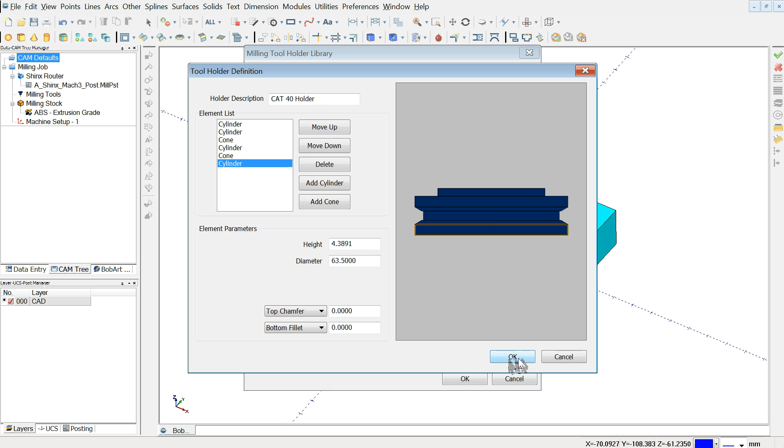So let's look at, as an example, we'll use a Cat 40 holder, and I've already modeled an ER32 arbor on that. So let's look at how it is as it's set up in Bobcad. The holder portion is the top portion of the overall tool holder, and it's just comprised of cylinders and cones. So you can adjust these to actually match precisely whatever holder it is that you're using. And so the first step will be creating it here if it isn't already here. So in Bobcad, you need to create your holder if there isn't one that already exists that matches. We're just going to work off ones that are already here for the sake of this.

And so then let's look at the arbor portion of that. It's the part added on to the bottom here. So you've got your holder at the top and your arbor at the bottom, together creating the overall tool holder. Again, if one of these works that's already there, you can just go down through and grab all these dimensions and you can model one of these. What you need to do is make a model of this. So while there will be one in here that it's going to use for collision checking and will actually show up in the machine simulation, there will also be a model of it in the model we create.

And I find that you really should use both, because it helps you to be sure that you've got the right holder in there. If you actually change holders a lot, you might have to modify that a little bit, but for the most part, a lot of us use the same holders for everything, and so if that's the case, then you're going to want to create the holder in your model.

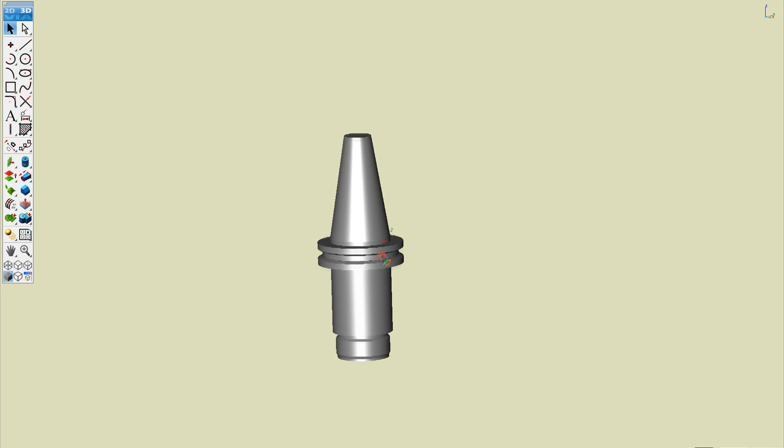So anyway, we have all this stuff here you can use to generate your tool holder, and I've already got one ready. I like to model in ViaCAD, and so this would be like the typical ER32 Cat 40 holder. The upper portion would be up inside the spindle, and then if I get rid of that, the portion that's left is the same as what's in Bobcad. So if I go back to my mill tool holders and go to edit arbor, you can see that it's basically the same thing. And I pulled the dimensions right out of Bobcad to make this one.

So once you have this holder, one of the things I like about ViaCAD is I'm able to just move things around really easy. Transforming is a breeze in ViaCAD. I think it's one of the best programs for that. So if you're doing quick 3D sketches and models of things, I think ViaCAD is excellent for that. If you're doing things that are getting really complicated, then other things like SolidWorks or Fusion are a little bit more stable. But for what we're doing today, this will be perfect.

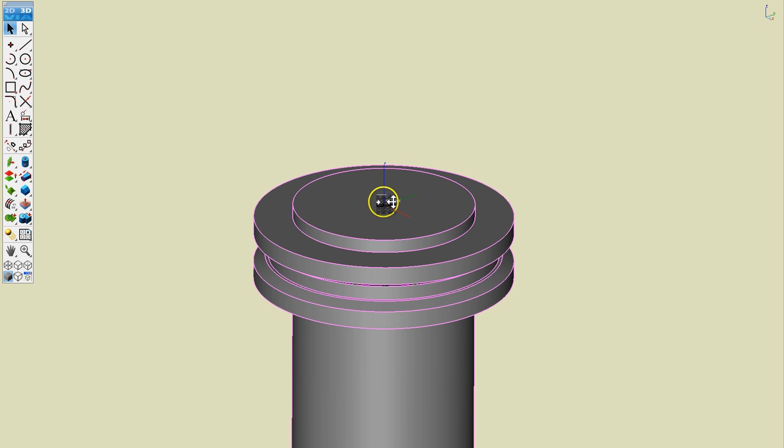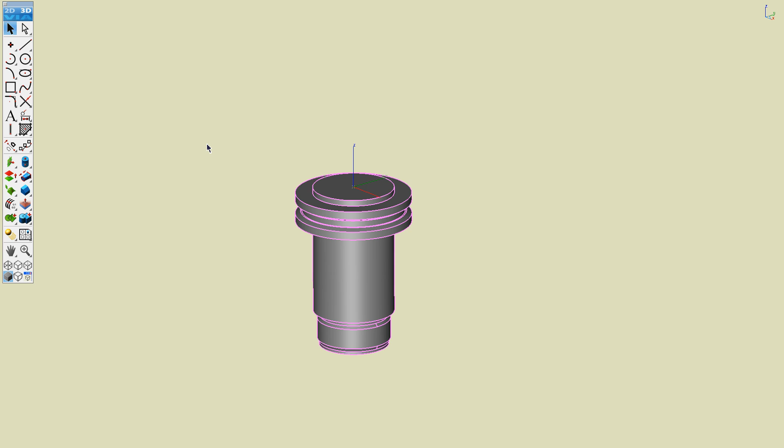So the main thing is that the top center of your tool holder needs to be the origin. And the origin of the machine, the way I look at it, is your home position. Now you could put that in a lot of different places, but my preference is to have it at the top of the Z-stroke, exactly the same as it is in the real world. When my machine homes, the Z-axis homes to the top of the Z-stroke, and on a router you actually home to the corners. We'll create a quick machine that homes more like a typical mill, but regardless, you want to model your machine starting at this arbor and working out so that it all lines up with the same X0, Y0, Z0.

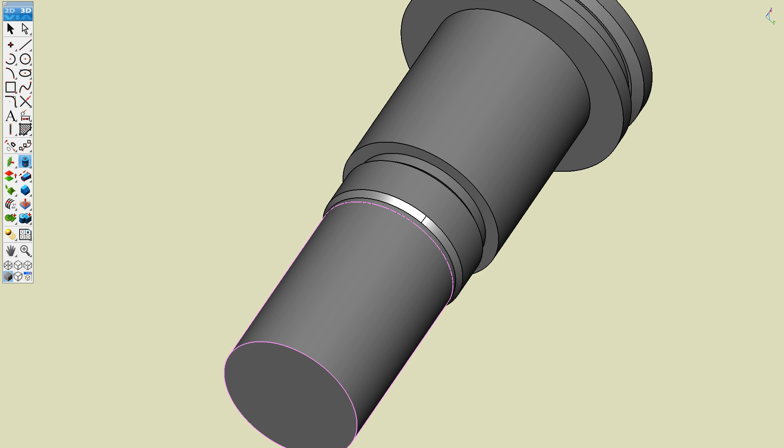And the way Bobcad works is, once it's in the simulator, it will actually take the tool holder and the tool, and it's going to compensate for their length and push the head up anyways. So I'm just going to add, for the sake of visuals, a quick tool. I won't actually export this, but we'll just throw a tool on here. That tool diameter will be 12.7 millimeters, or a half an inch, and 65 millimeter protrusion. So it'd be an end mill or a router bit or whatever it is that you want to think of it as.

So this is where we're starting from. Now let's look here then.

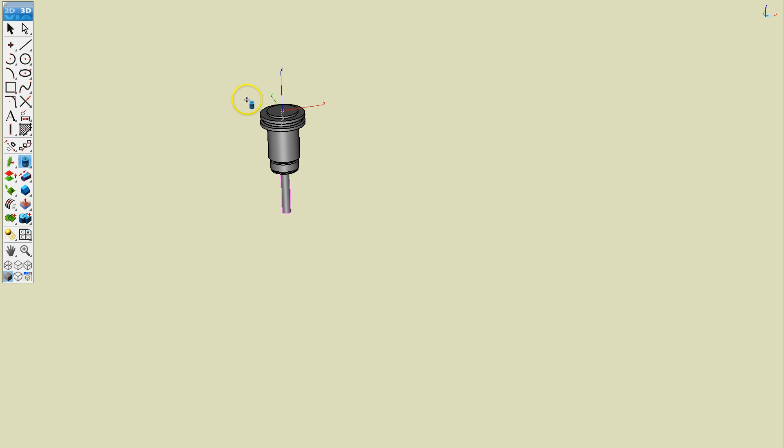And my mouse has been misbehaving today when I'm doing a video recording, so it's a little bit trying at times.

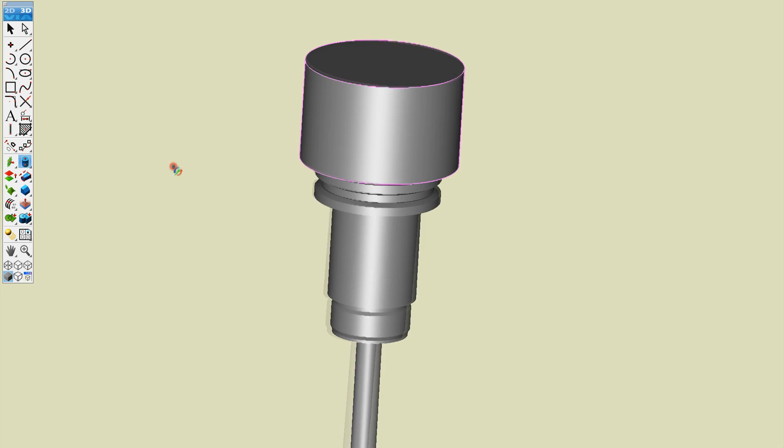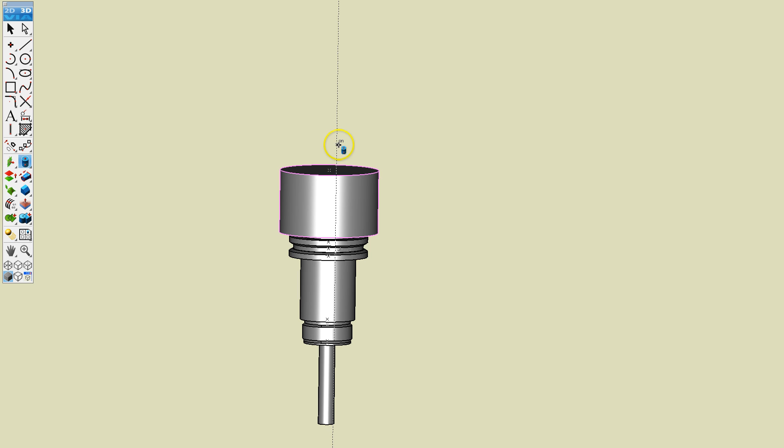So I'm going to start with creating what we could term the spindle itself, and I'm going to make that about maybe 80 and 50. In the actual mill, this probably extends further up, and may even be a little bit larger than that, but that's close enough for now. So that's our spindle. This is the first part of the actual machine, and if you were to do a tool change, you would pull that tool holder out, but this part would remain. In the real machine, obviously, it would have a taper, and that taper would be a cavity there, but we don't really need to do that for the sake of the simulator.

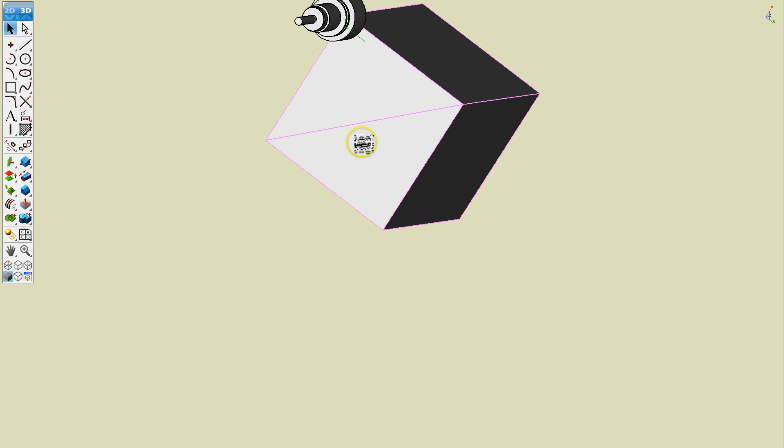Okay, so now I'm going to create the rest of the head. And I'll make this about 250 square and about 350 tall. So again, I deal mostly with routers, so it's a little different than a mill probably, but it'll still get the point across. Just gotta find my midpoint there. Sometimes this goes better than others.

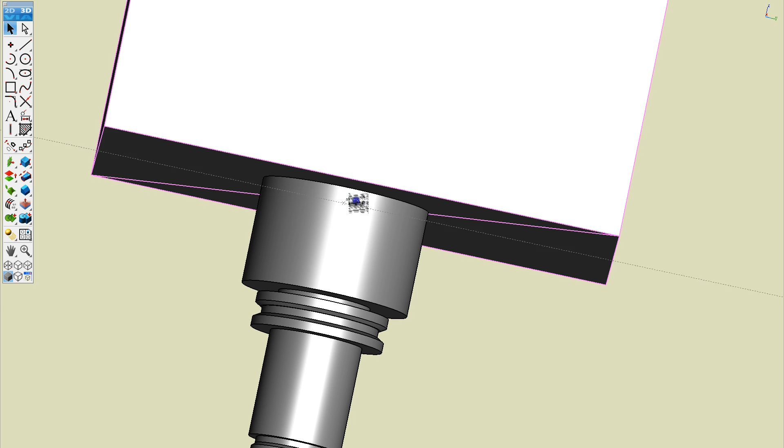I'm also using a screen that is a lot trickier to use than I'd like, because it's a 4K monitor and I'm only using about a quarter of my screen right now, so it's very hard to see. It'll look big on the video, but it's actually quite small for me.

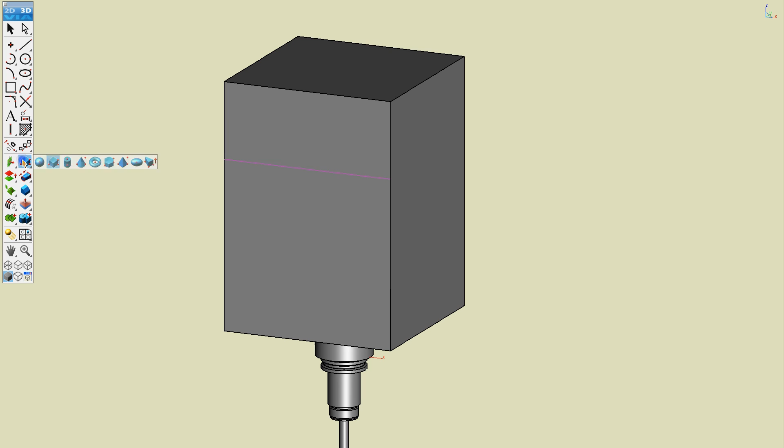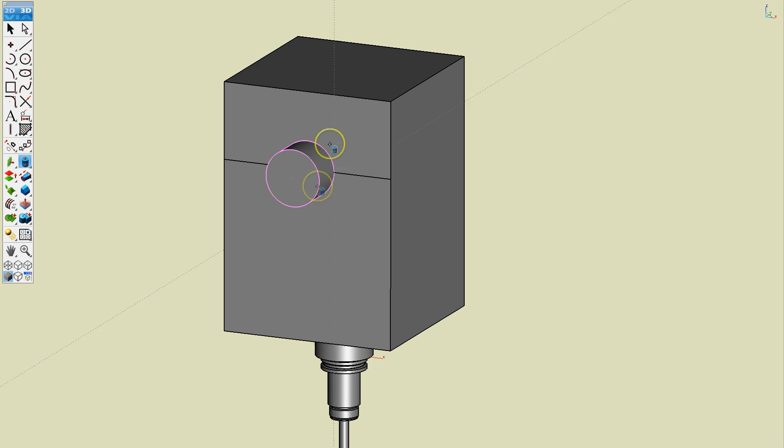Alright, so there would be our head. You can make it as detailed as you want. This would be the front because the x-axis is pointing the other way, so this would be the front of the mill. So for instance, some of the details you could add, my machine has a micro adjusting dial, and we'll make that 65, 80 by 50. And so that's just so that I can micro adjust the height of the z-axis. But I just wanted to add that in so that I can show how you can group things for giving them a color.

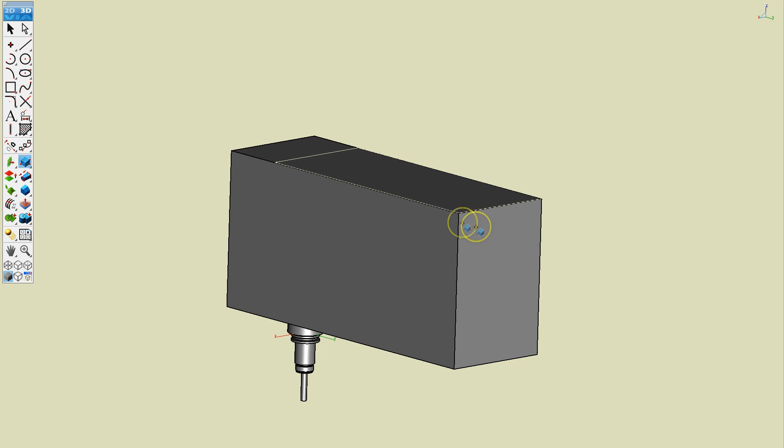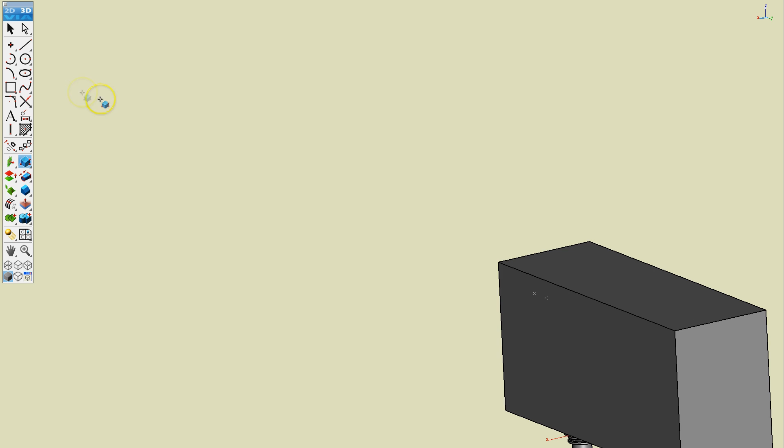So let's now expand this side. I'm just going to make this bigger by about 500. Okay, and this isn't really all that realistic, but it's just for the sake of demonstration. So now I'll do another one. I made a mistake there. Let's try that again. I see it's still on my other work plane. Let's see, over 1,000. Okay, and maybe I'll even make that 1250.

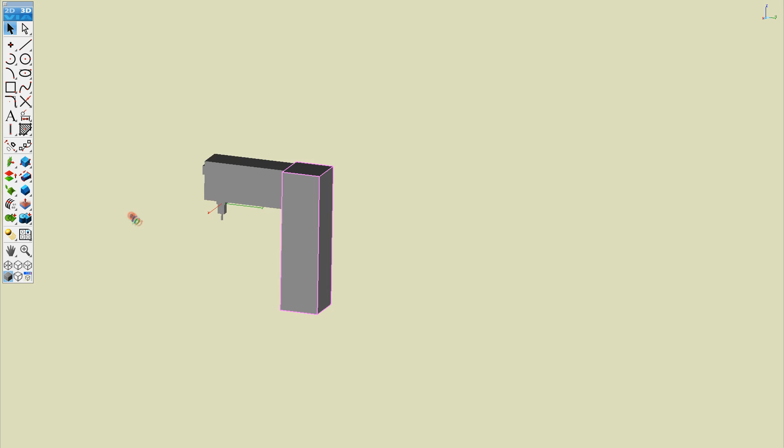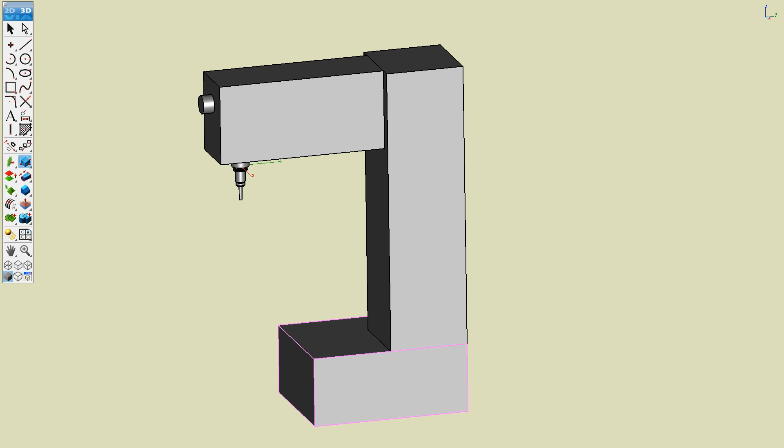All right, now a base. And that I will make like that. And for the base and the column, I just want them to be one entity, so they'll be added together here. Okay, and now say 750 by 500 by 150.

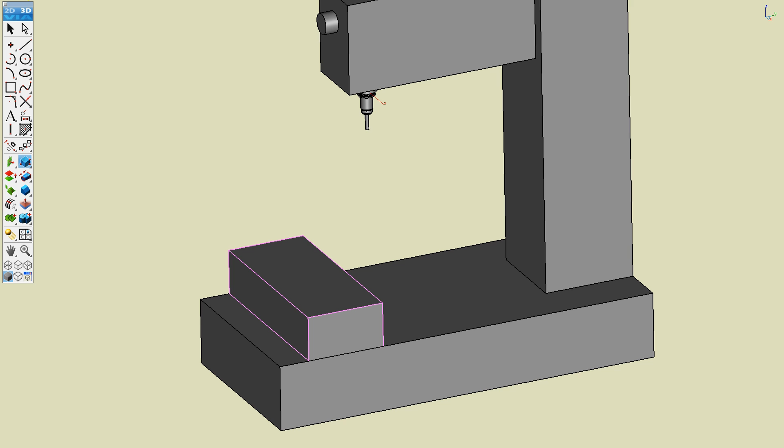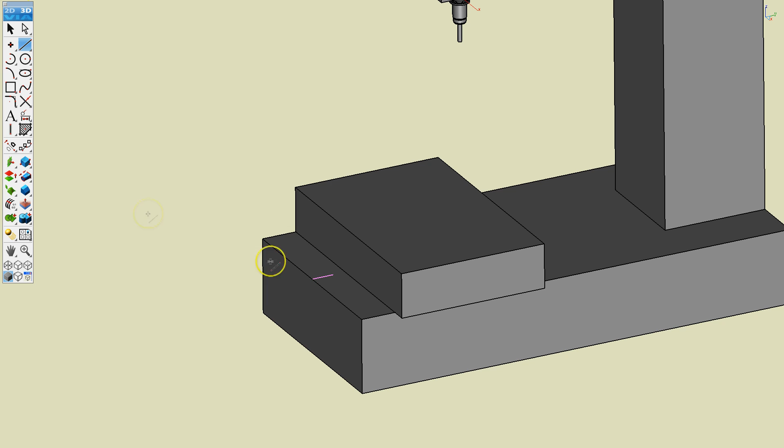That'll be our y-axis. So we have our z-axis and our y-axis here. And I want it to home with the table back, because homing Y negative is, I think, most common. So we'll say that it comes within 75 millimeters of that edge. Again, you would have to know your real machine, what exactly it does, and you want to get it right down perfect. Whatever it is that it does when it homes, that's what you want it to do in your simulation. I'll do another.

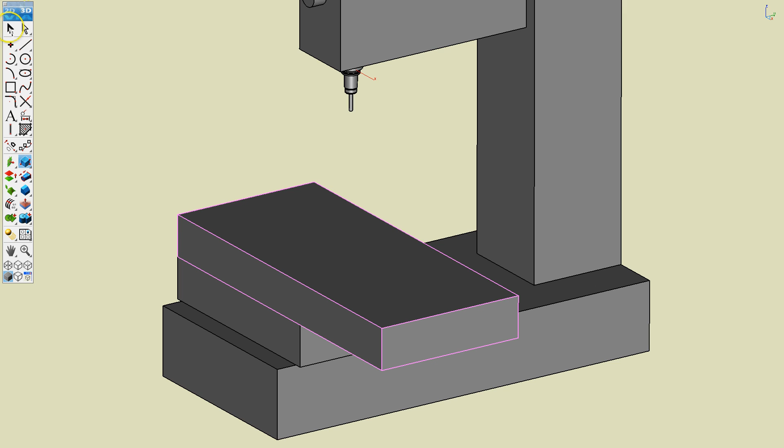This one will be 1250 by 550 by 150. Okay, so that is our x-axis, and I think I need to just move this over by 25.

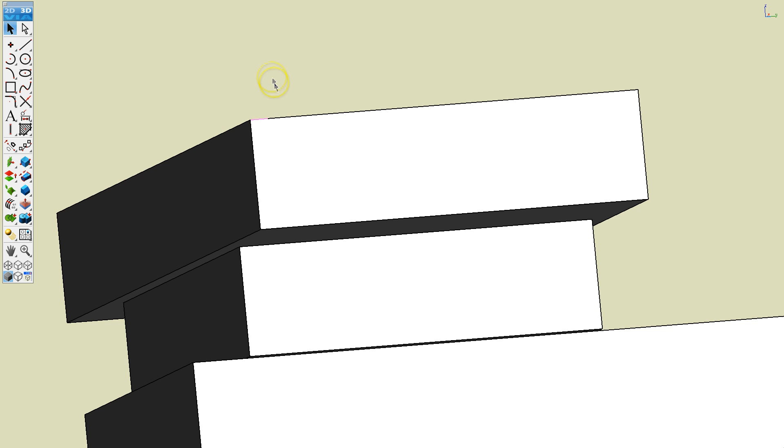Okay, so now we have our x-axis, our y-axis, and our z-axis. Your configuration may be a little bit different, and then you just have to adjust in Bobcad as to how you set up the machine in the system.

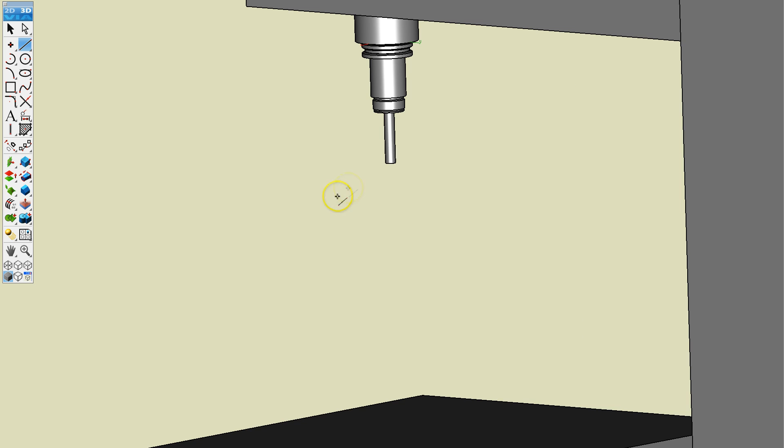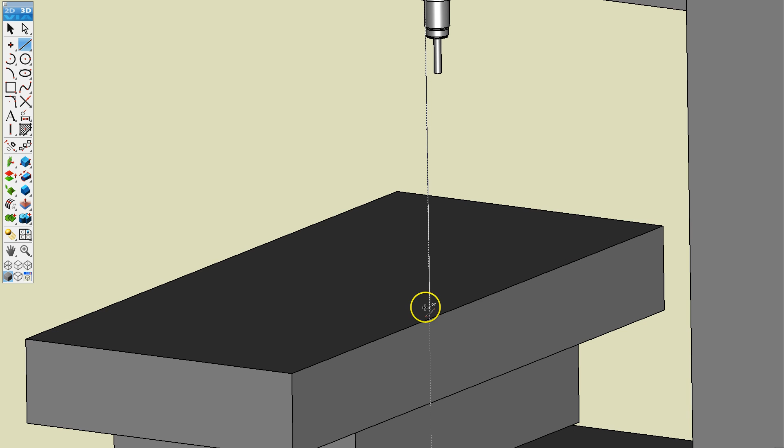Another thing that we need to know at this point is essentially your work offset, because just like in the real world, the simulator will need a work offset down to your table so that you can put your part down on the table. So basically that comes from the bottom of the spindle, because it's going to automatically offset for the holder and the tool, and so there it's intersecting. That's 550 millimeters between the spindle and the table.

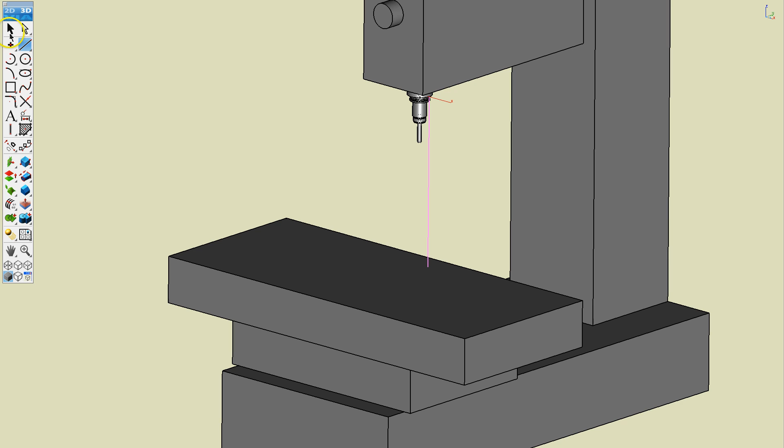So basically, whatever your work is, let's say that you have 50 millimeter thick material sitting right on this table, then you need to offset the head down 500 millimeters, and then Bobcad will automatically offset it back up the height of the tool holder plus the tool. And so then essentially, if 0 is at the top of your stock, that would place the end of the bit at the top of your stock. So 550 is our number for that.

Otherwise, I think we've got everything modeled that we need. I'm not going to keep the tool. I just wanted it there as a visual, so I can make sure that this looks about right. So let's export these parts as STLs, and we want binaries. And so I guess first I need to select.

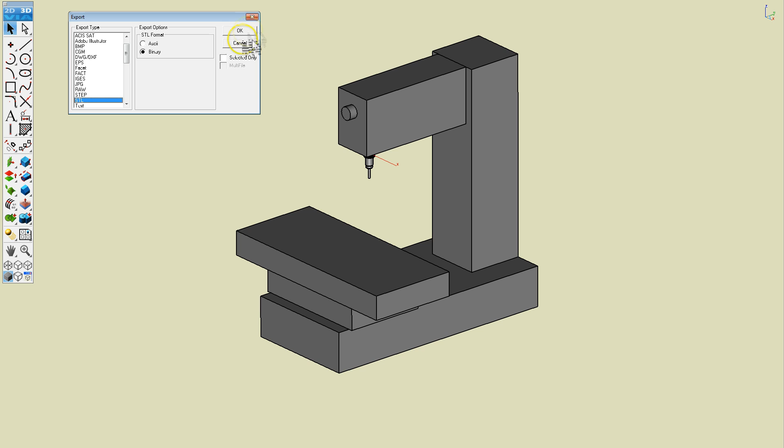One of the things I can do is I can make things the same color, and I want to keep the tool holder in mind. You could opt to not have the tool holder, but in this case I want it because I want to show why I like to keep that where it makes sense. Like if you're someone who has the same tool holder all the time, but may have a couple different machines that have different tool holders. So let me export that, select it only, and I put it into this folder here, and that'll be the tool holder STL.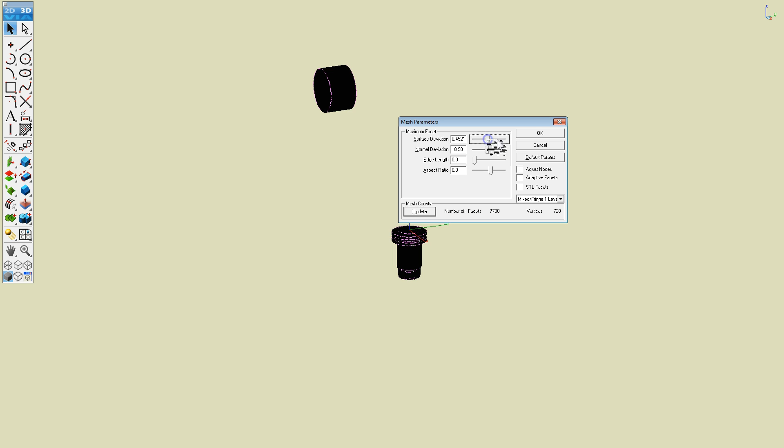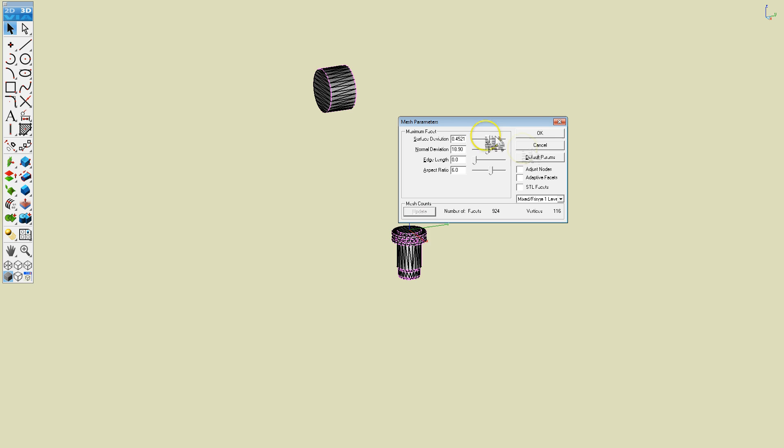And so here it gives you the number of facets you're using. Since we're not really collision checking with these necessarily, we can reduce the facets down to something more manageable, because the software will still make these look really nice. It doesn't need that many faces. If you were using something to collision check, then having more faces would probably provide a better collision check. But for visual stuff, it doesn't really matter so much. So hit OK.

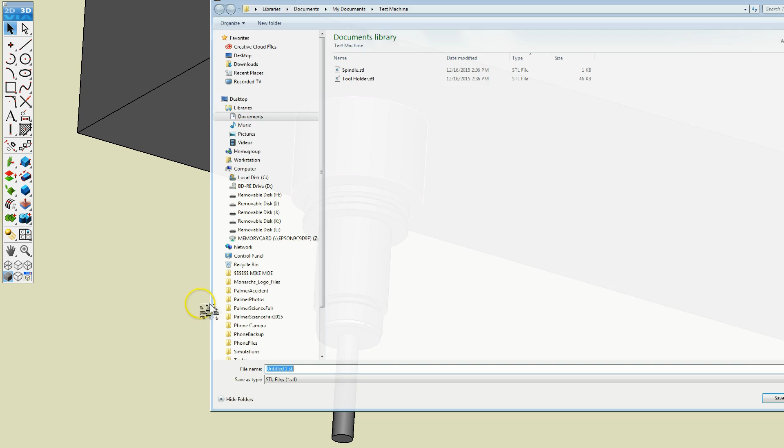Now this is our z-axis, or we'll call it the spindle. And you're never really going to get less than 12 on a box. That's just what it is for a box. Cylinders, though, is where you can save some facets. So we'll call this the spindle end. In fact, maybe I'll just change the other one's name here to z-axis, and then we'll call this one spindle.

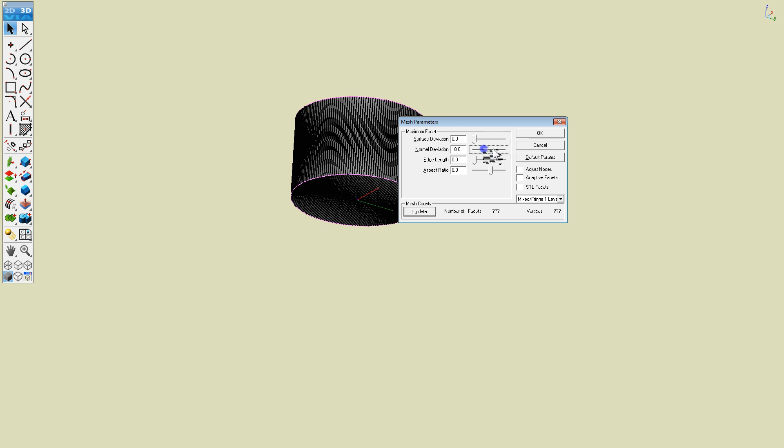Alright, and again, you can see there's a lot of facets there, a lot more than we need. So we'll just crank that up. That's good enough. Just to make sure that we didn't overwrite that other one. Yeah, we still have our files. Alright, and we'll do the column.

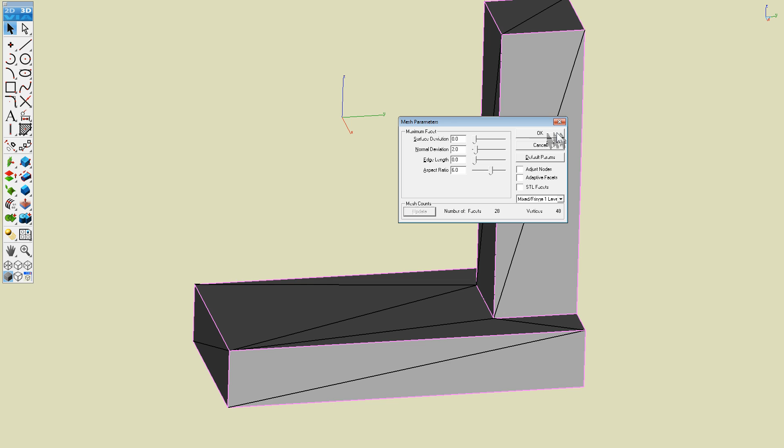And so when I'm saving these, they're all going to maintain their relationship to this origin. This particular software does not change the origin. Some softwares I found do that. Like if you save a portion of a file, they'll reorientate the part around an origin, almost centered on it. And that's not good. We want it to be maintaining its relationship to the origin. Otherwise it won't go together right later on.

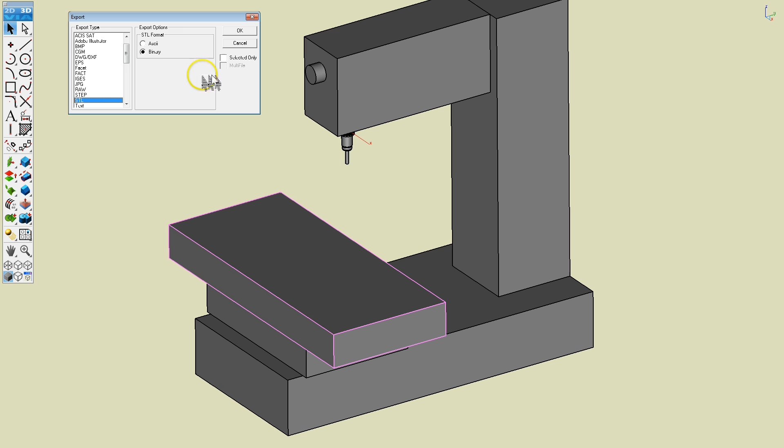Okay, and this is the y-axis. Okay. This is the x-axis. Alright, so at this point we've saved everything we need out of our CAD software here, and we're ready to bring it into Bobcad. So the first thing that we need to do is we go to Bobcad. Let's get rid of these.

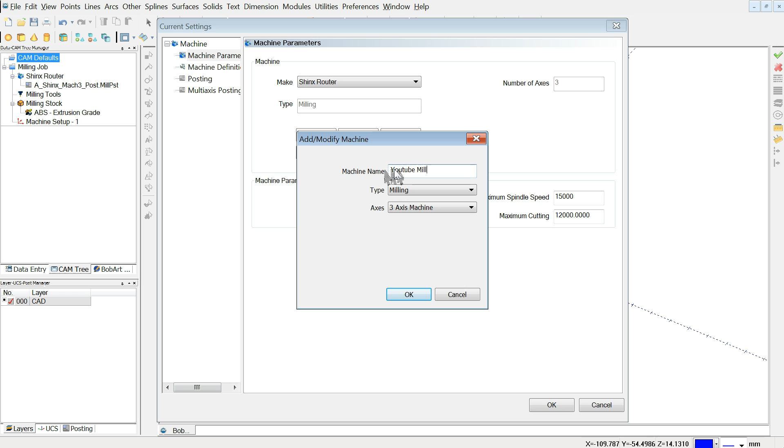I gotta make a new machine, so I'm gonna go current settings, add, and we'll call it YouTube mill. And it's a 3-axis machine, it's a milling machine, so we're good there. It's in metric, so these are millimeters per minute. We'll say 15,000 millimeters per minute feed rapid, 12,000 millimeters per minute maximum feed, 15,000. These are more router numbers, they're just the numbers I'm familiar with, so we'll make it those.

Now this is the standard way to do a 3-axis. I'm not going to get into how you do other things, but you can have the y-axis moving on the x-axis. So the x-axis in our situation is moving on the y-axis. So we start with a y-axis, and there's an x-axis on the y-axis with the workpiece transform.

So the z-axis, you can see, is not in this tree here because it's a separate axis. It's moving independently of these. And our z-axis in this case has the tool in it as well. So that's the holder transform and the tool.

You can configure these things differently, but this is the standard 3-axis. I haven't really had a 4-axis, so I'm not sure how you add the 4th axis to it, but I don't think it's really that hard to figure out. The main thing is, again, doing the modeling all relative to the same origin, and having that origin make sense for the machine.

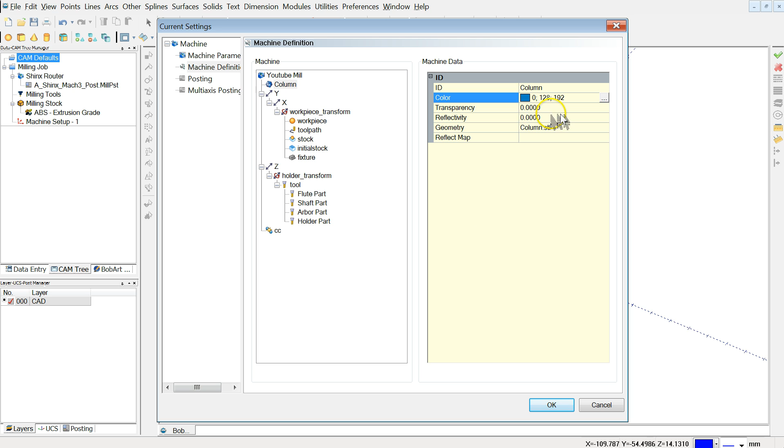Now I'm going to go to my y-axis. I'm going to add my y-axis geometry, and you can have more than one thing on each axis, and they can be different colors and stuff. So if you have a lot of different things that are all moving together, they all get added under the same thing, and you'll see that on the z-axis. So y-axis, and we'll make that blue as well.

Now the x-axis will be our cast iron table, so we'll make that a dark gray. There's our x-axis STL. X-axis, and we'll make it this kind of darker gray there, and we'll give it some reflectivity. I don't exactly know what the scale is of this. I'm sure there's a reference somewhere that tells you. 5 is kind of moderately reflective. It looks kind of like metal, so that's where we'll set that.

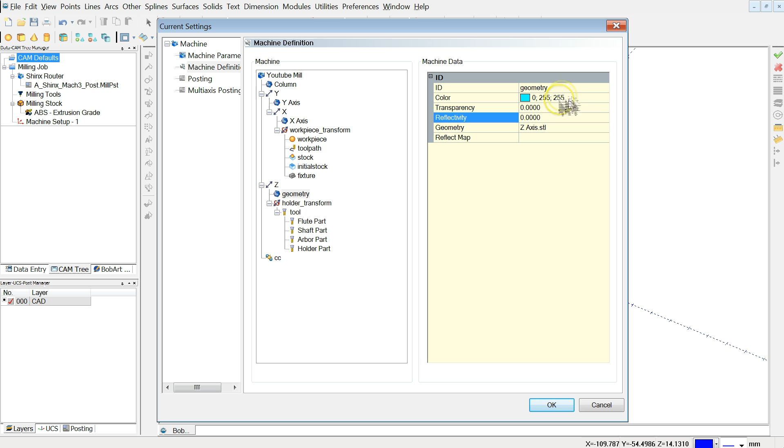Now Z, you have to add some geometry. We'll add the z-axis first, though the order doesn't really matter. And then we'll change the color of this to, say, blue. Then we'll add the spindle. And on the spindle, we'll make that a kind of a lighter gray. And again, we'll make it reflective. So 5.

And then we got one more thing to add. So we'll add our tool holder, which is kind of an optional thing, but we're going to do it. Again, the software will put a tool holder in there anyway. This just allows me to see that they're the same, and I kind of like that personally, so make that the same gray. Alright.

So we're good. The last thing that we have to do is we have to now make those STLs available, because for some reason it doesn't actually take them out of the folder, and it won't remember the folder you have them in. So you have to copy them. And now that we've made a machine, you'll go to local disk C, Bobcad cam data, then whatever version you're running, go to machine sim, and we call it YouTube mill. So there's our folder it just created, and you can see there's nothing in it. It needs to have the STLs in there.

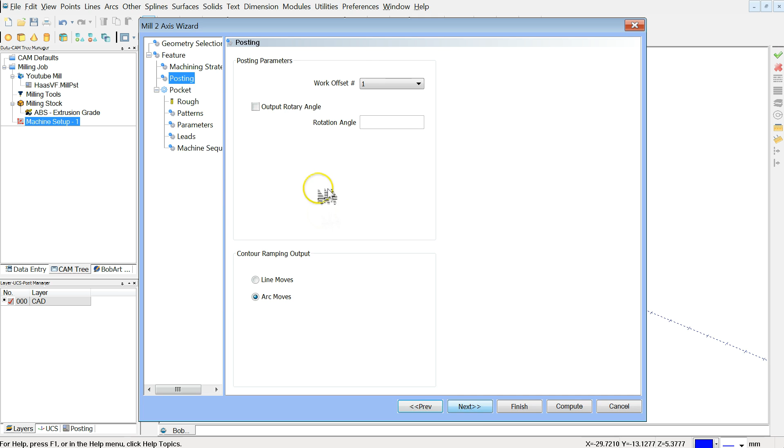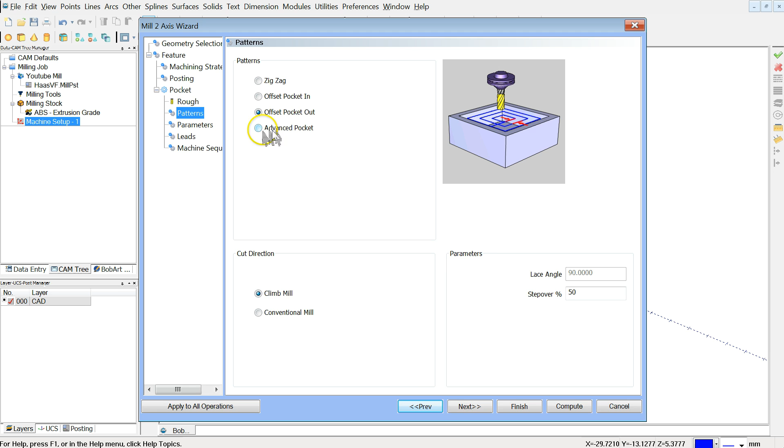Okay, so now here it's important that you get the right tool holder. This tool looks like it'll work, so we'll remove the tool holder, assign tool holder, CAT40 ER32, which is what we're using. So now we've got that in there. Turn that off. Let's leave that. And there's our pocket. So I think we should be set up, so it should come up. So let's see what happens.

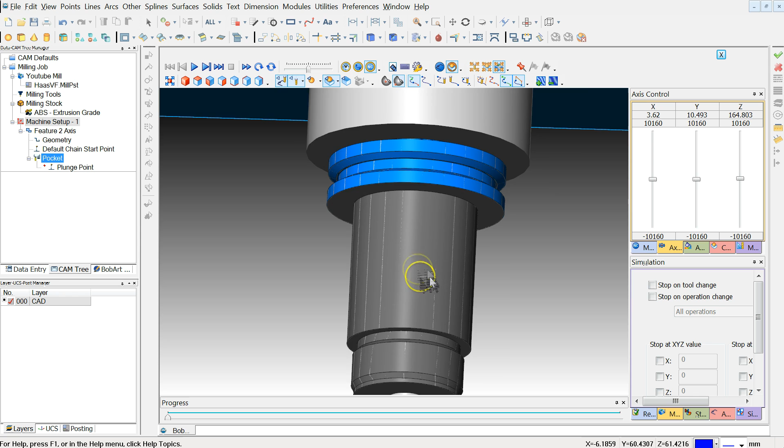Alright, so there's our mill. So as I said in the earlier portion, when we're making the mill, it will compensate for this tool here. And here you can see this striping of light gray here. That's actually the model contained by the Bobcad generated tool holder. So there's a tool holder on top of a tool holder right here. The one Bobcad generates is the one that will be used for collision checking, so it needs to be there.

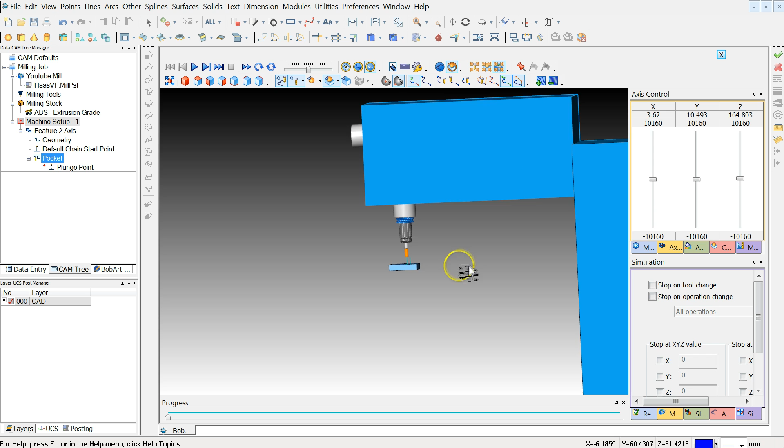So if you didn't have the tool holder in your model, this tool holder would still be there. And I'll show that in a little bit. But what you can see is that the head got pushed up. And the head got pushed up to compensate for the length of the tool holder and the tool. So that's the amount it got compensated up.

Now remember, I said it was 550 millimeters from the spindle to the table without taking into account the tool and the tool holder. And then we have 20 millimeters of material here. So to bring this material down onto the table, you have to use work offset. And this is how you line your stuff up to your setup.

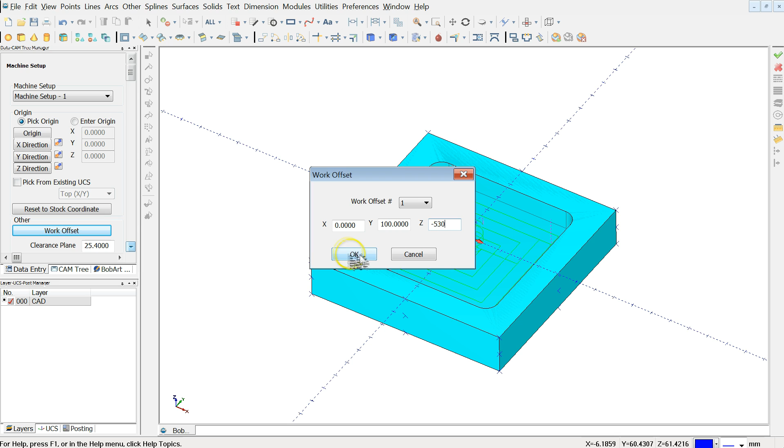So you go into your work offset. I'm going to also move it. I think that's going to move it further onto the table for me, having it go further on the Y. And then minus 530 should get us to where the bottom of the material should be on the table. And there's a lot of different ways to do this particular alignment of the machine to the part. Let's see if I got that right.

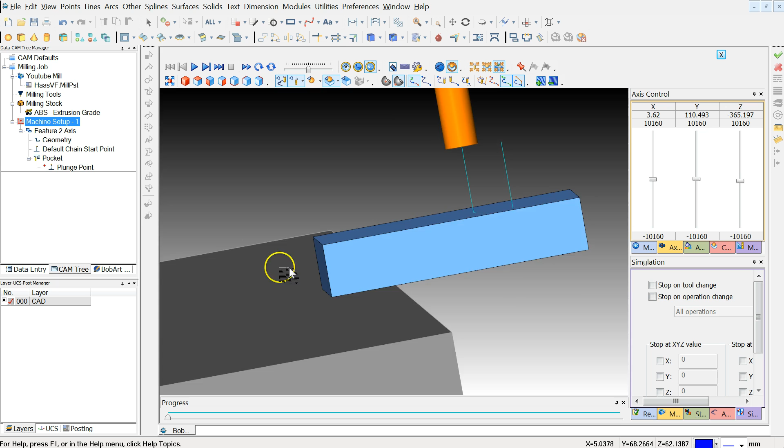Yeah, so it's on the table, but I think I moved the table the wrong way. So I've got to put a minus there. So let's go back and do that. So a minus will bring it more into the middle of the table. Okay, so now let's see how that worked out. Should put our part right where we want it in the table. So yeah, it's more in the middle of the table now, and you can see that the workpiece is sitting on the surface of the table.

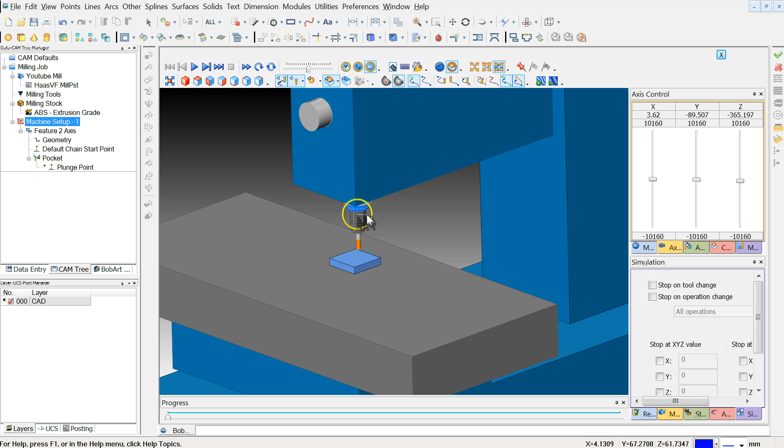So if you had a vise or something, you can use math to figure out exactly where you need to put your part to get it to simulate properly and to do collision checks and all that. So you could also have the spindle, when you do your model, all the way down on this table. It would actually be the other way around. You would be bringing the table, the column, the x-axis and y-axis. You could raise all of those up so that they're touching the bottom of the spindle, as if the tool holder and tool are stuck in the table.

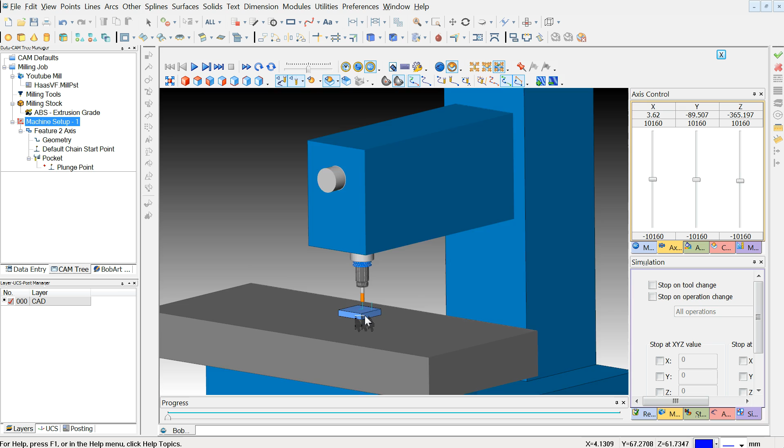And then when you first start your simulation, it'll move this up so that the tool is on the surface of the table. And so then if you further have stock and you program with the bottom of your stock as 0, or the table as 0, it would all work out by itself. You wouldn't have to use any work offsets. But I think that's kind of the harder way to program. So I prefer to program from the top of the stock, because that always varies. If I have a vise or whatever on my machine, it's going to be higher.

So the bottom line is that for your digital machine here in the simulation, you still have to set it up the same as you would set it up in real life. You could look at it as, when you come in here to your work offset, it's the same as when you enter a work offset at your actual machine. It's the difference between machine coordinates and work coordinates.

So once you know your formula, like distance from table to spindle, then all you have to do is do the math to figure out how high to set your work offset, and you'll know exactly where to put your Z. And the same is true for your X and your Y. You'll know where your vise is on the table, and so you'll always be able to get it to work. So anyway, we'll run that real quick.

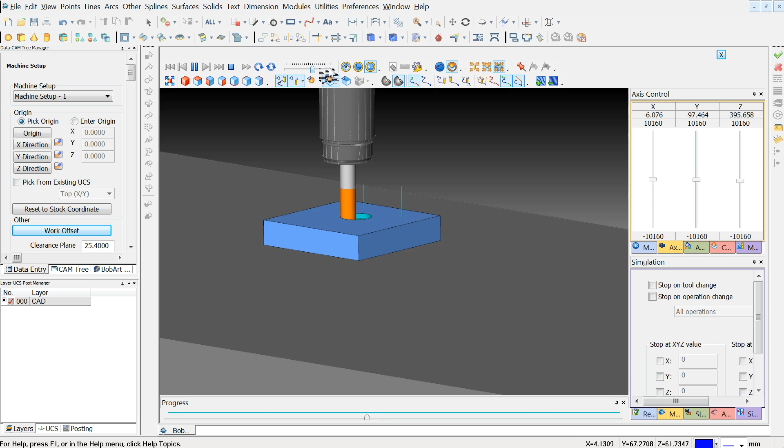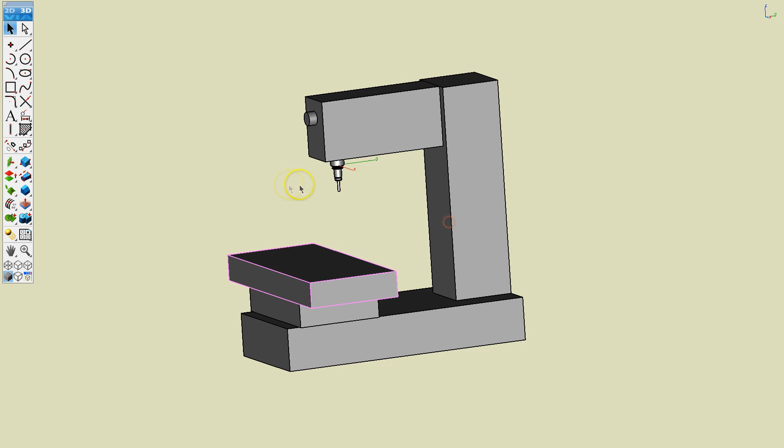So what if I do want to have my spindle down at the table level instead of way up here? So instead of my machine home being up here, maybe I want my model to have the spindle down there. So I'm going to do a couple of things. First, I'm going to show what it would be like without this, but also show how to reposition things around it. So first thing to know is that we're not going to move the head to the table. We're going to move the table to the head. So I'm just going to make these disappear for a minute.

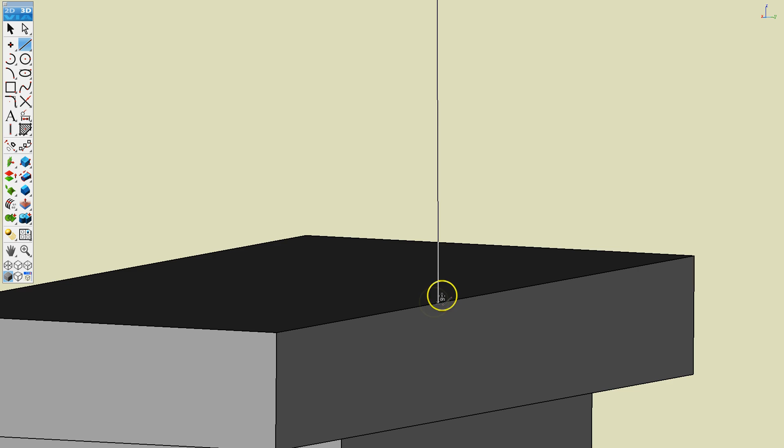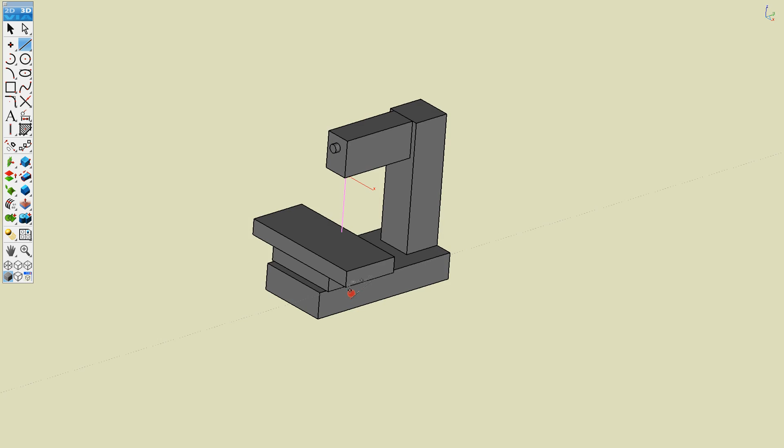And then I'm going to grab a line off the center there. Like I should be getting. There we go. So it intersects with the surface. Again, BobCAD I think is just very, very intuitive in how you can do things. So I can get a nice square line there that I can now use for transforming.

So I'm going to take everything except the z-axis. So I've got the column, the x-axis, and the y-axis. And I gotta add one more piece of geometry here. And so now, when I want to move these, I can just move them up.

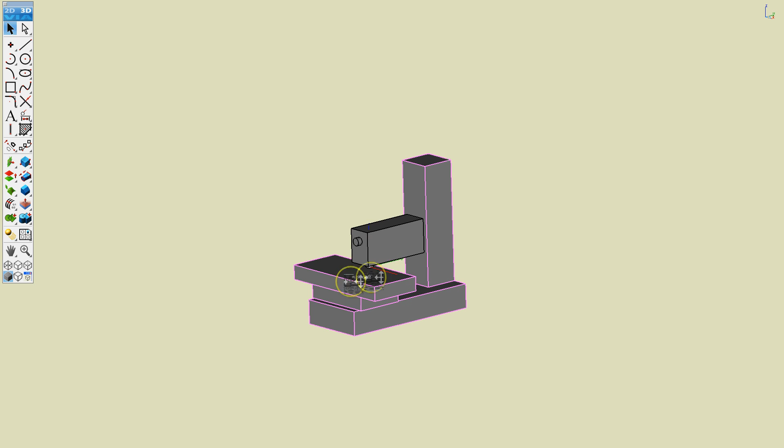And you can see that our table is touching our spindle now. So this is the other way you can do it, where basically this sets it up so that your machine is going to always have the tool touching the table as your 0 point. You could do the same thing if you have a vise that you always zero off of. You could model your vise on there and then set it up to be touching the vise. It really comes down to whatever is most convenient for you.

So now what I'm going to do is I'm going to re-save these pieces of geometry. So that is my column. And yes. That's okay. I need to save my y-axis. And I need to save my x-axis.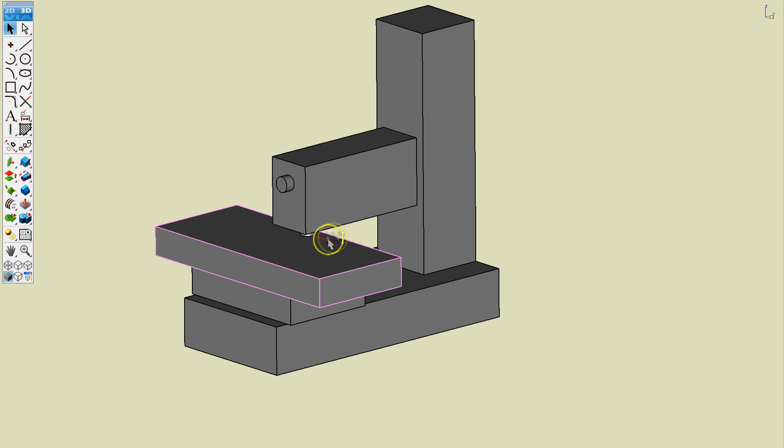Now, I'm also going to eliminate the tool holder so you can see what it looks like without the tool holder in the model. So I'm going to re-save this as the tool holder, but it won't have the tool holder included. And again, I want to reduce the facets here. Okay.

And I've got to go move my files. I already removed them, so now I'm going to put them back. And so it doesn't really know that you've changed them, and it doesn't really care. BobCAD, that is. BobCAD just references them. So now when I go to mill, problem is my machine setup is set up different, so it's going to be way too low. It may not even like that. In fact, I'm going to just go edit that right now.

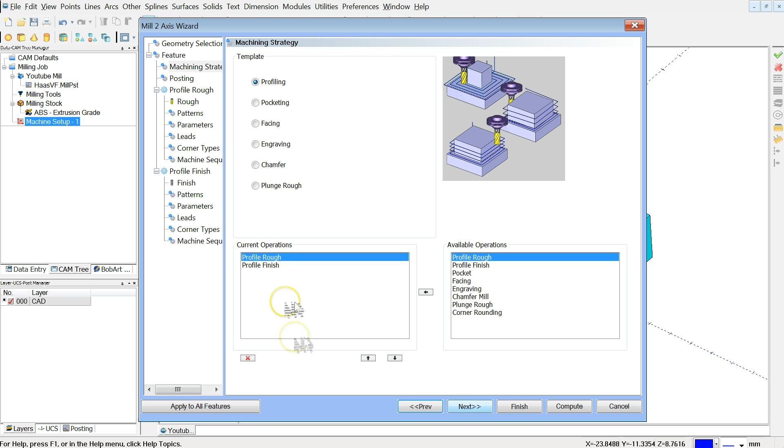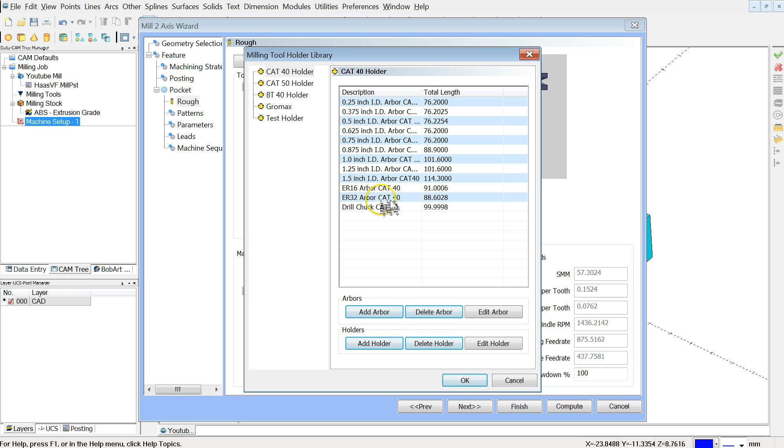So this would allow you, because I don't have a tool holder in my model, this would be if you interchange different arbors. You could actually use any of these CAT 40 arbors and it should work fine. It'd be a pretty accurate simulation. For now, we'll just go through here again. And let's see what we've got. So remember, I have no offset right now. And I'm programming from the top of my part. So you may have seen this in the BobCAD mill before. The part you can see is exactly flush to the top of the surface.

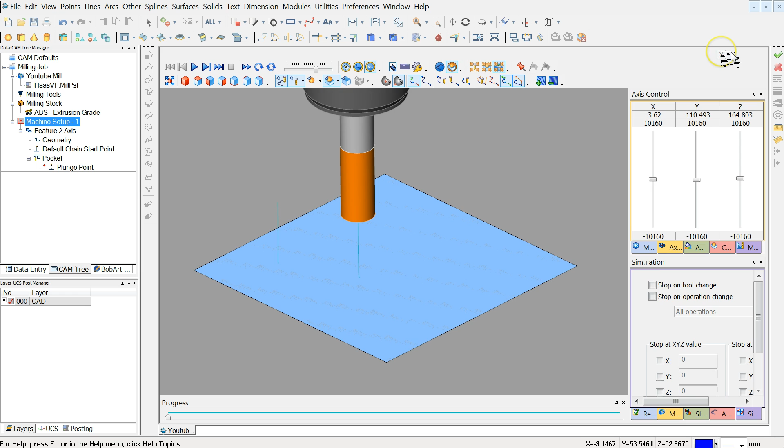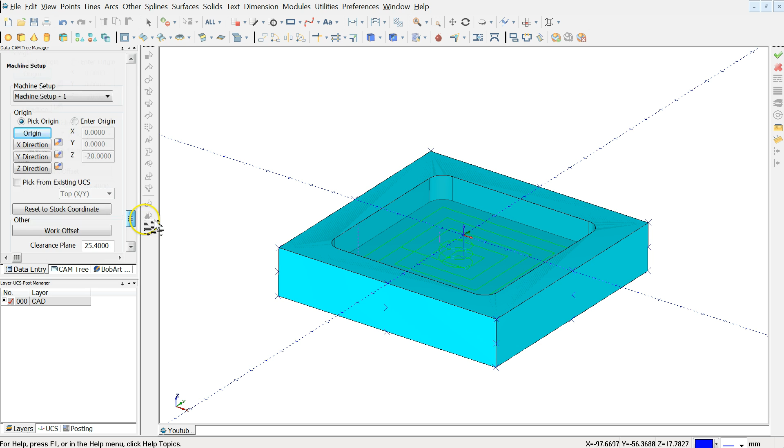So again, I could change how I program. So I could go to my machine setup. There's a couple of ways you can change this. You can change the origin to the bottom. And that'll do it. And see, now it's simulating, right? So if that's how you like to program, then you can do it that way.

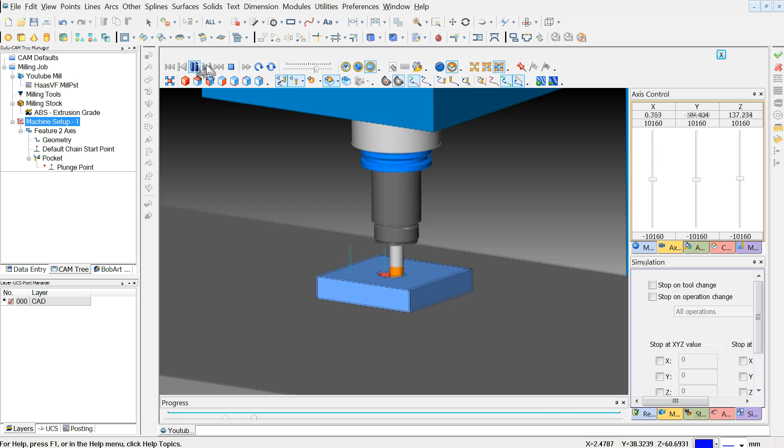And here you can see that even though I didn't include the arbor in my files, I've got my knob there, but I didn't put an arbor in. Now there's none of that striping because there's only one arbor, and that's the one that BobCAD generates. So you can see the BobCAD generated arbor in the spindle. And I need to recalculate. Actually pick a different bottom. There we go.

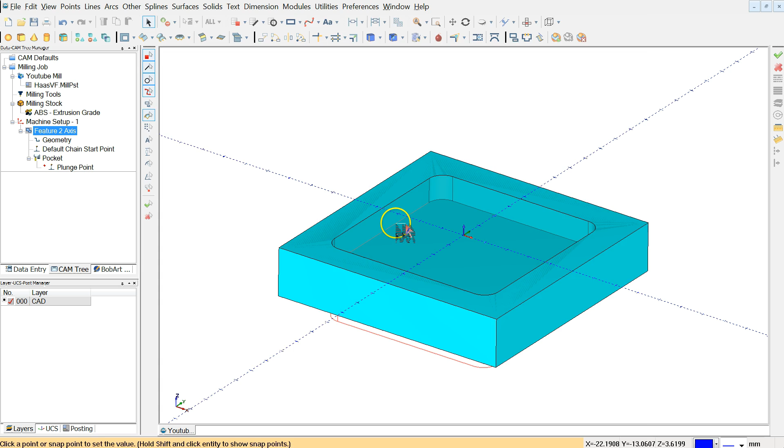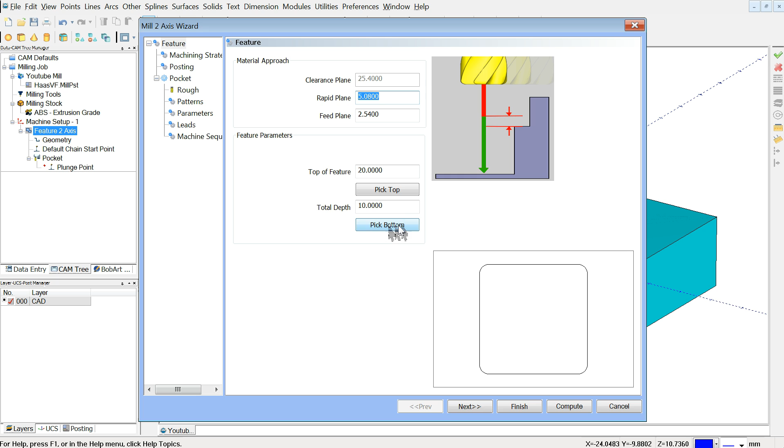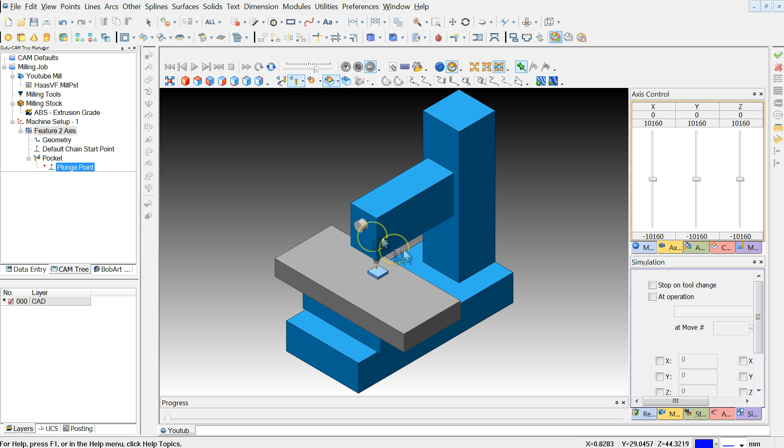It's still showing up there. That should actually be plus 10, I believe. This is not the way that I normally program. Oh, I think I need to pick the top. Now compute. So normally I work from the top of stock, so this is kind of very backwards for me, but that appears like that works. And you could see that there was a collision warning being given earlier when it was cutting into the table. So, you know, it's what the simulator is for. And there you have it. So that's another way to do it.

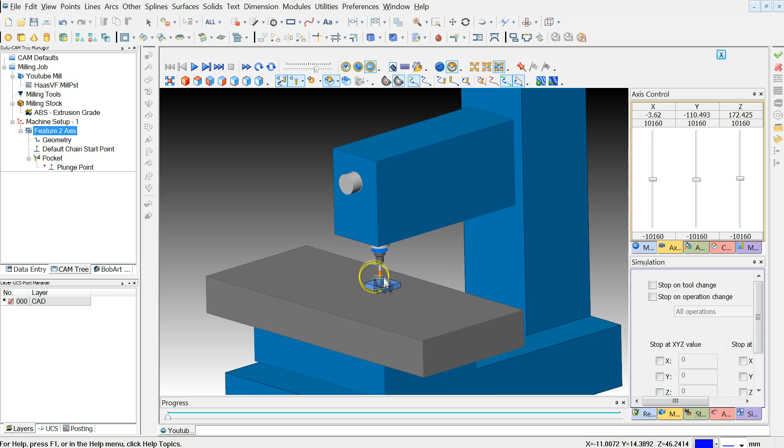Now, because we have a different tool holder, we can also change that. So I can put a different tool holder in now. And you'll see that it adjusts it. So this one should look a little bit different than it did before. You can see it's a new tool holder, but they always get placed at the same spot, and BobCAD will always offset for the tool holder and the tool automatically as well. So it's kind of all the same. You just want to make sure you have the one that you're actually using.

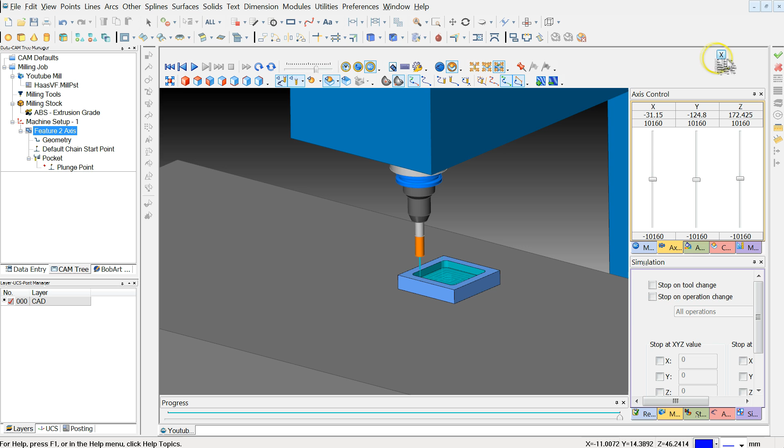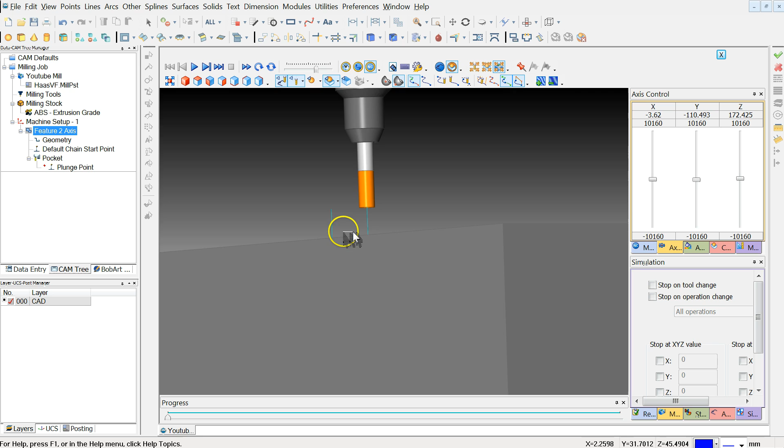So another way this could have been done is, instead of changing how you program, you could still program from the top. If I bring the origin back to the top, but then I do a work offset of Z plus 20, which is the thickness of my material, that should do the same thing. So now I can program with the top being 0 and the bottom being below 0. And it will still generate the same result. There's a lot of different ways that you can do this, so you just kind of have to figure out what way works best and go with that. That's generally how the simulation works.